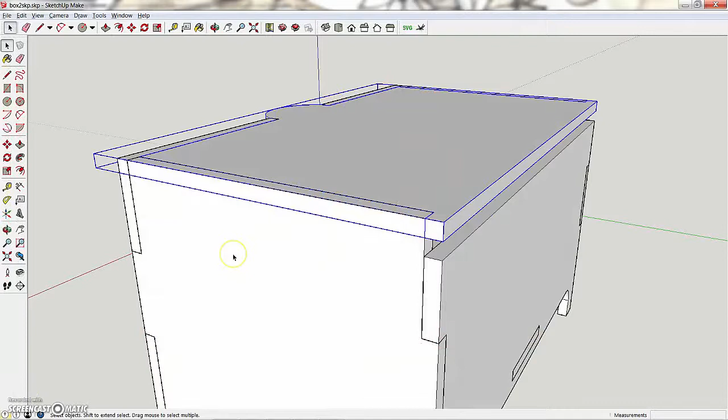So we're going to experiment a bit on the sides here. I know that I need a circle starting in the center of this lid pivot. So I'm actually going to go into that and just make a line here so I can easily find the center of that. So let's double click on our side again to edit it.

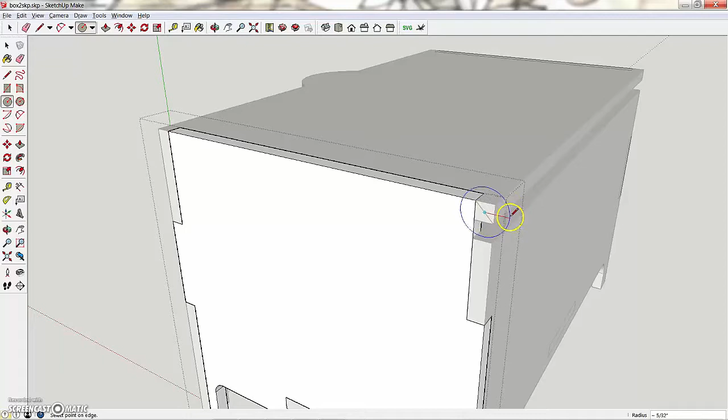And the first circle has to be just a tiny little circle. I'm going to make it go to here. And that's going to be glued on to this little pivot, just this little circle, and it's going to turn around this bigger circle. So let's make the bigger circle.

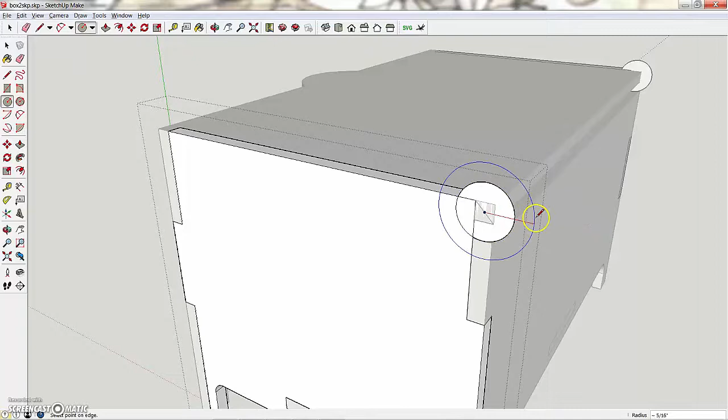So from here it is 3/16. So let's make the bigger circle. Let's make that 7/16. No, that's too big. Let's make it 6/16. That's good. So now we've made this circle.

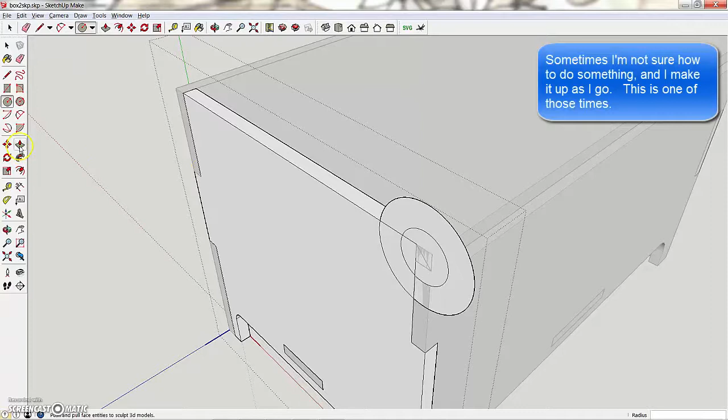And the side, actually, we're going to erase the parts that are here. So our side will now, I'm going to edit, view, component, hide rest of the model now, because I no longer need it.

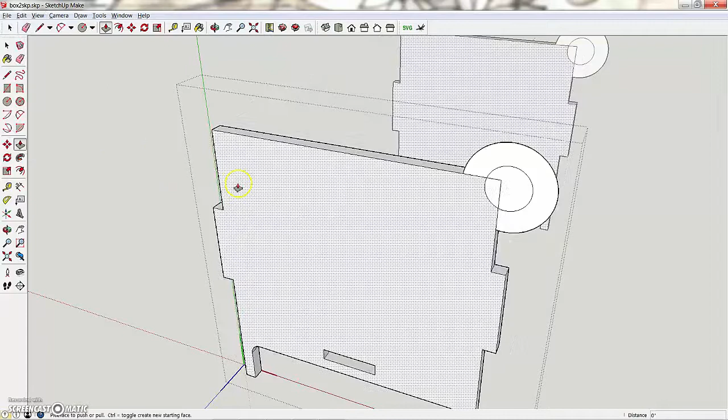So as you can see, I have my circle on one side. I'm going to pull that over here. I'm going to erase the little lines that kind of hold it there. And I'm going to get rid of this little guy here.

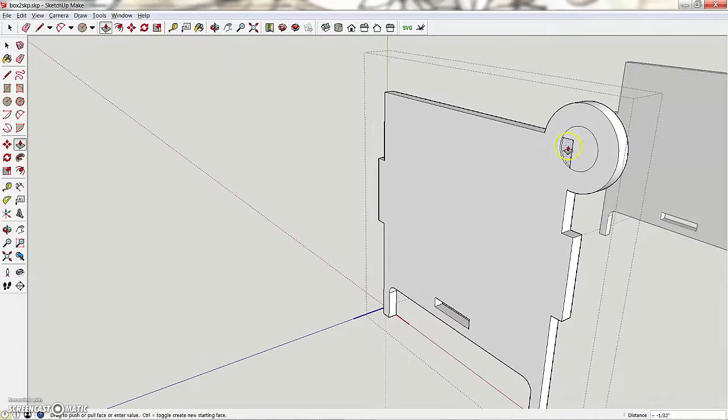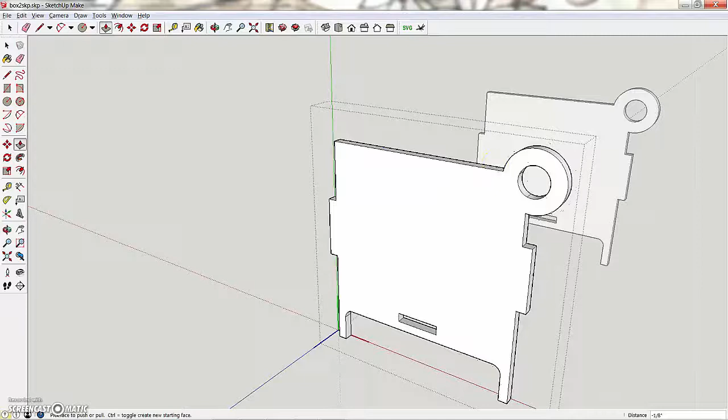So I'm going to first get rid of this guy. I'm going to pull to here. Then erase it. And then I'm going to pull to there. And there we go. So I now have a nice side with a little place for the hole in the pivot. But I seem to have gotten rid of that hole here, so we're going to have to remake that.

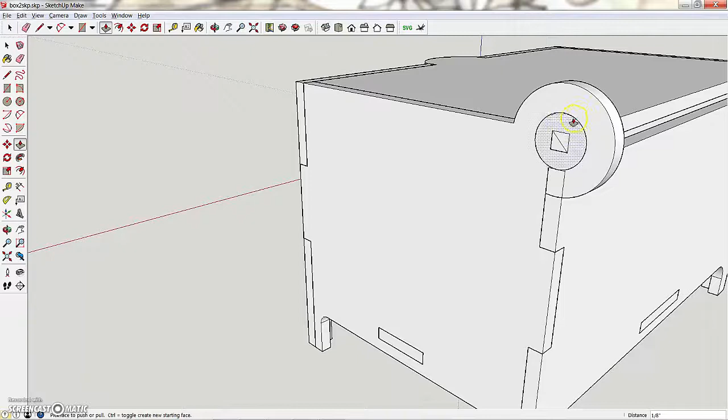We're going to make it as a separate component. So again, we find the center. We're going to go to here. We're going to take the rectangle tool and make this. And then we are going to pull just this little coin thing 1/8 of an inch as well. So I now have a place that we're going to glue onto this square peg.

I'm going to triple click on it and make a component out of it. Square hole, we'll call it. We'll just call it SQ.

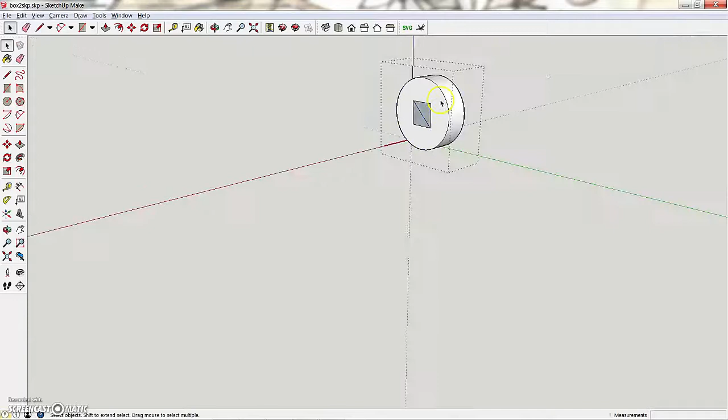So now if I double click on it, you can see we're just looking at that. We're going to get rid of the line in the middle, and we're going to get rid of this hole. So we now have a round part with a square hole. That's going to hold our lid in place.

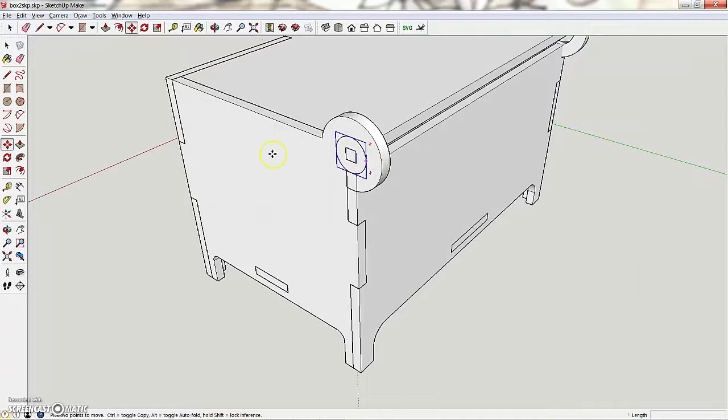Now we're going to take that one and we're just actually going to move it. As we're moving it, we hit Control. I'm going to hit the right arrow so I can only move in one direction. I'm going to come and move it over here because we want one there as well.

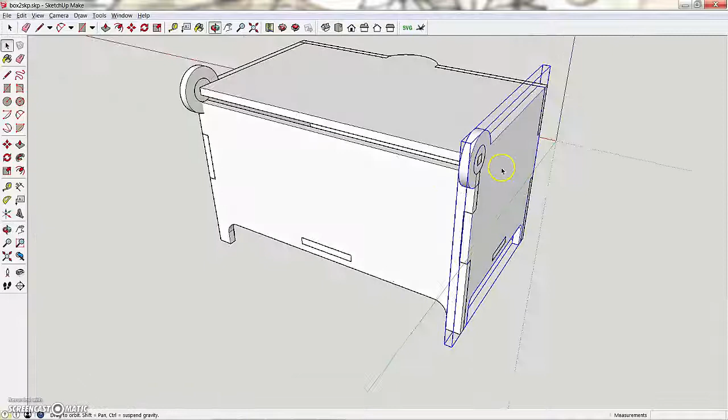Now notice when I edited this side, since we made a component out of it and copied that component, the other side automatically updated as well. Now there's one little problem here, is that as you can see, the back and the sides are intersecting right here. So we have to either change the back or the side to take that into account.

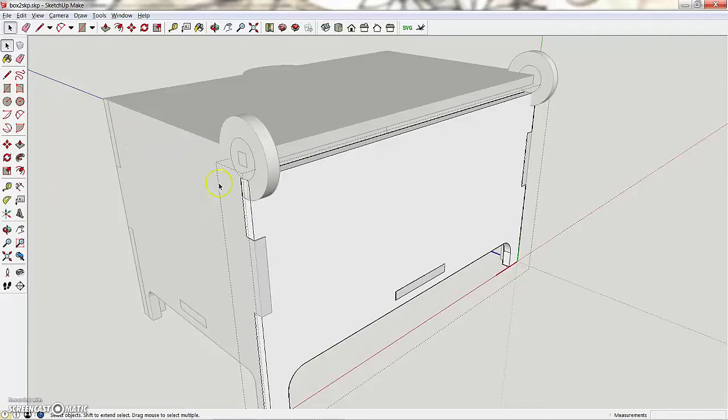So I think it's probably easier to take the back. We're going to say View, Component Edit, hide the rest of the model so we can see where it's at. And we're going to make a little line from here to there. And then we're going to make a line that's 1/8 long. So that we just clear that, we're going to make it go up to there.

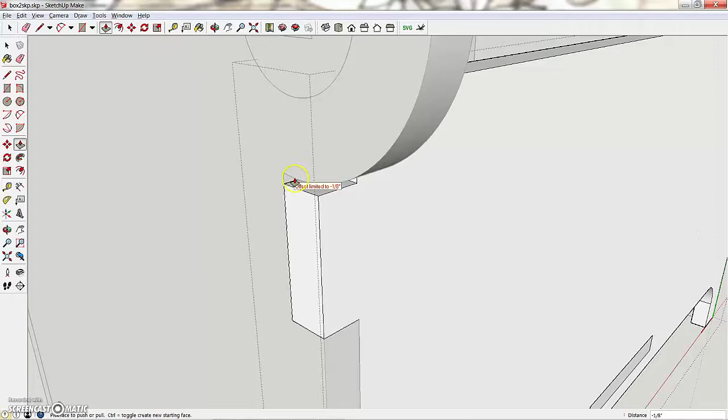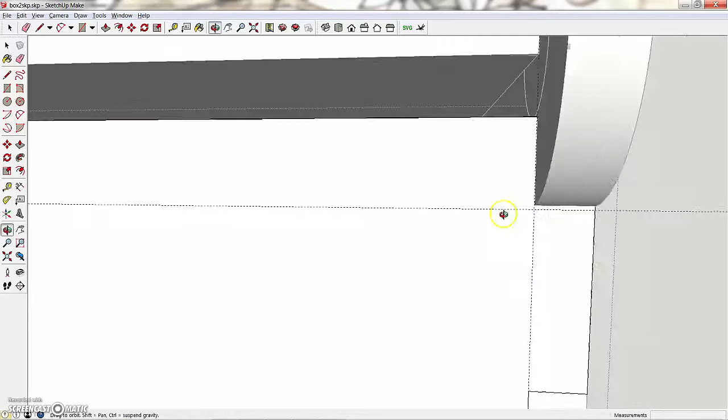And we're going to pull this whole part right off. And we can actually pull this up until it just kind of touches, so that clears it. So we're going to use our tape, make a line, and go do the same thing on the other side. And here we're just going to make a line at 1/8, hit the rectangle tool, R, go from there to there, and then just use the push-pull tool to get it out of our way.

And we're going to get rid of that guide and this guide. So we now have pretty much our entire box and all the parts of it.